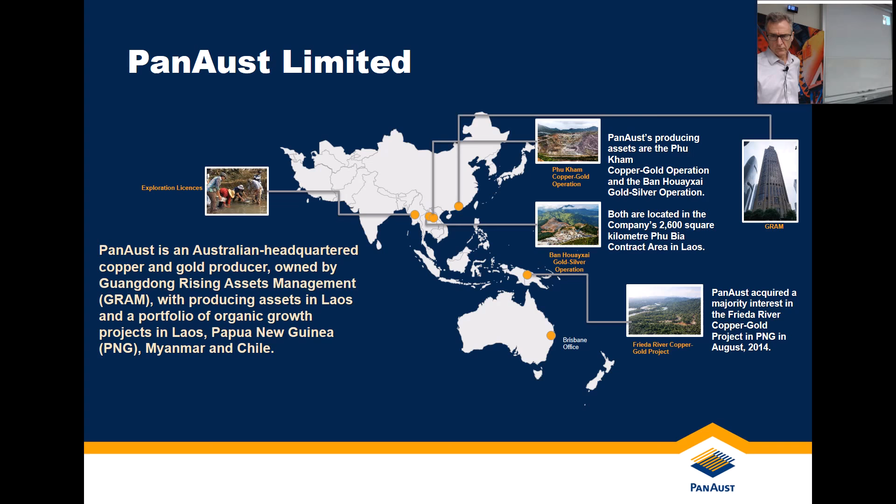So we produce copper concentrate, and the copper concentrate has gold and silver in it, and that's what our sellable product is. So Phu Kham was commissioned in 2008, and the control loop set points were mainly determined by the operators as and how they saw fit.

In 2010, the technical director at the time decided that we need to change things, and he wanted to automate the plant so that we could improve our throughputs and recoveries. So he put together a team of technical experts, and in 2012, with all seriousness, we started trying to transform this plant.

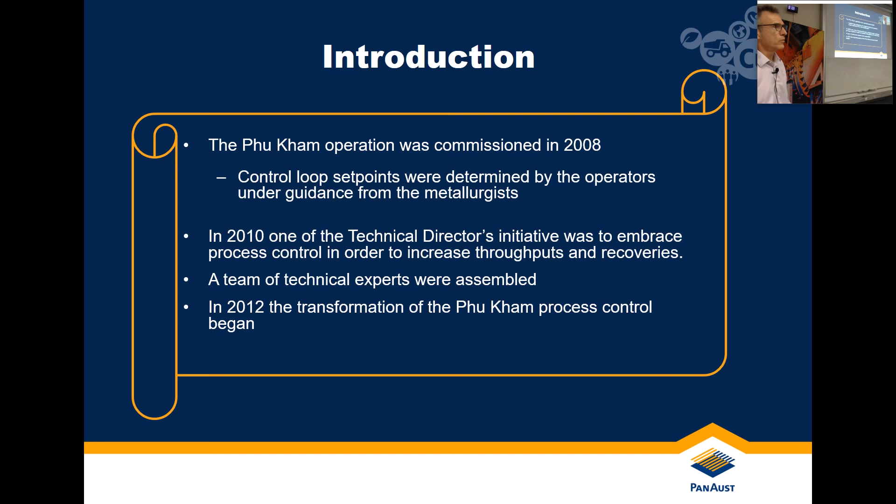Our strategy first looked at what the problem was, and we saw that the operators were sitting down at the bottom and they were just setting all the regulatory loop set points. We wanted to move them up so that they're actually not adjusting set points. They're just monitoring the operation, and if something goes wrong, they must intervene upon exception.

So to achieve that, we had to improve the stability of the regulatory controls, develop some advanced control systems, and then we needed a holistic control which would tie the whole plant into one operating unit. And the operating unit's objectives would be determined by the company's objectives. So that was the idea.

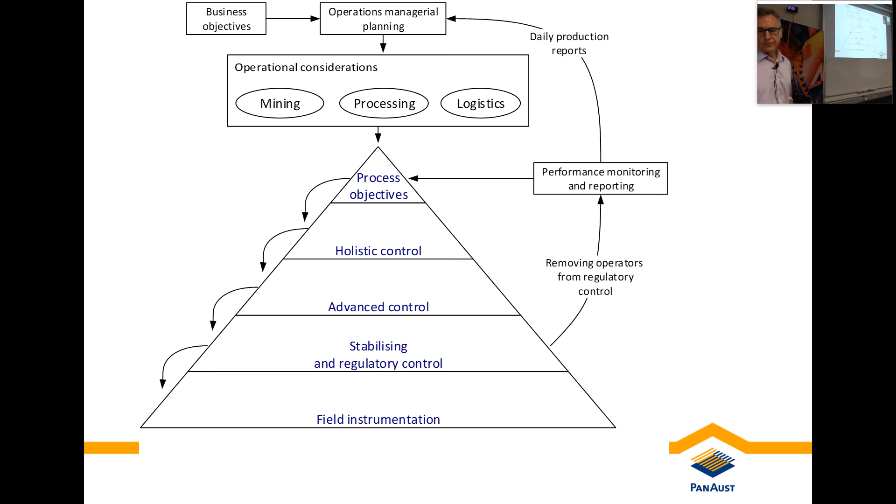The strategy: lift the operator's role from setting individual loops to monitoring and intervening on exception. The expertise lies within the metallurgists. They've done 4 years of studying and so many years out in the field, as opposed to an operator who's been just exposed to a very small spectrum.

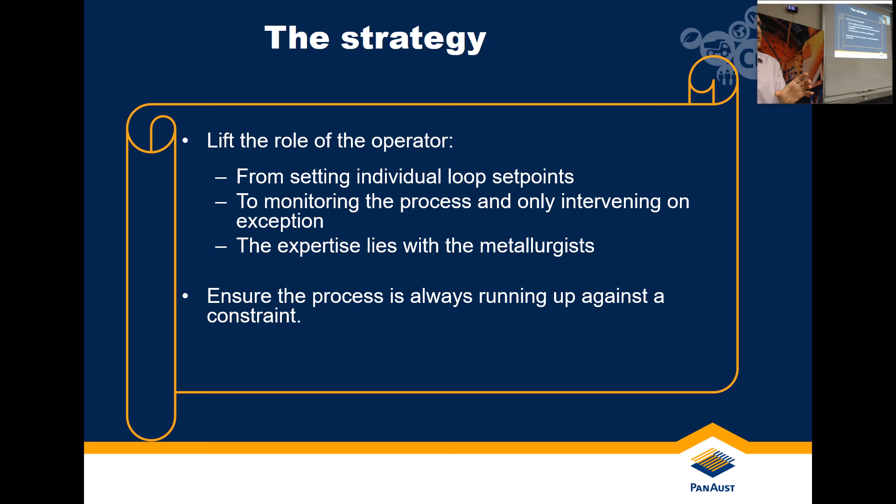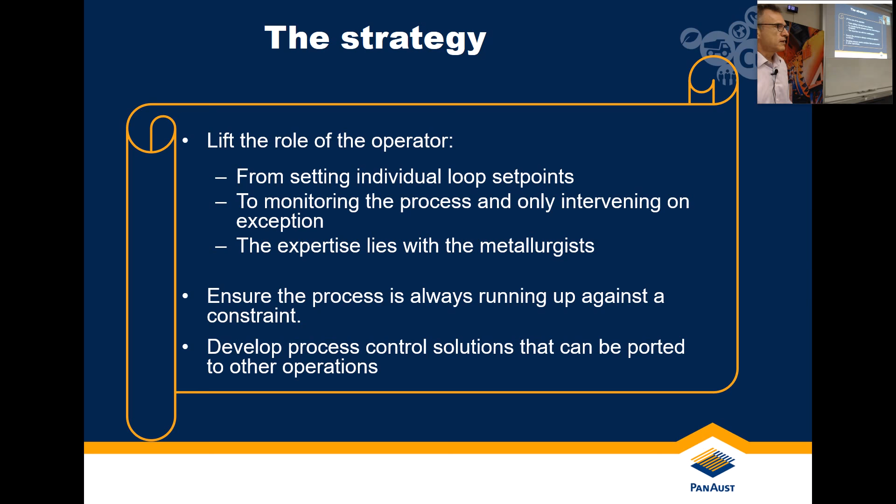So we also want to ensure that the plant is always running up against a constraint, so therefore we can get the maximum throughput and recovery. And we wanted to develop solutions that could easily be ported to another plant, so we don't have to redevelop the wheel every time we have the problem.

So the tactics were: start at the bottom and stabilize the plant, get the instrumentation working, and apply good first principle loop tuning, which is boring and overlooked.

The next step is to improve the operator's situational awareness. This is very important because the operator needs to know if there's a problem so he can intervene at the right time. So that means the graphics and the alarming has to be designed for the operator.

And then we needed to identify what are the best solutions going to be, because there's so many solutions on the market. We've got these fuzzy expert systems and all other different things. We decided to just go with model-based control, and there's a little bit of model predictive, but it's mainly model-based control. So it's understanding how the plant behaves and then making a control model that will control the plant.

And we developed all this in the DCS, and we didn't want to have another black box tied on, which has communication problems between them and all that sort of stuff.

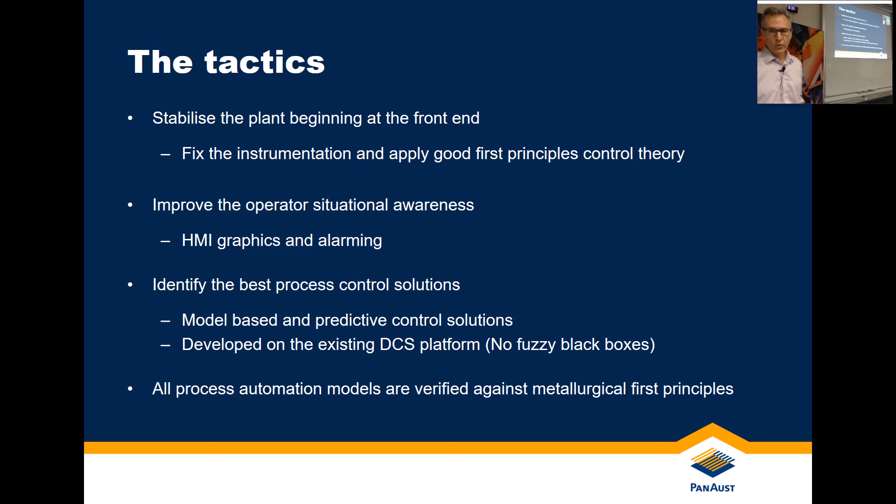The other thing, once we identified a process model and seen, okay, this is how the process behaves, then we wouldn't just go write some control. We'd then look up some papers, just understand, are we sure? Do we really understand why the process is behaving like this? Has other people seen it? So it actually took a bit of time. It wasn't a couple of weeks that we could just go through this and get it going.

Okay, before I go any further, I just want to give a rundown on what the plant looks like, so when I talk about different areas, you guys will know what I'm talking about.

The concentrates from the roughers go through a regrind circuit before all the fast floating stuff is scalped by the Jameson Cell. Then we have the 3 cleaner banks. We did some modification on the cleaner banks because we found there was a bottleneck, so the modifications we've done around them, including splitting off the first cells, address the bottleneck. And finally, the dewatering.

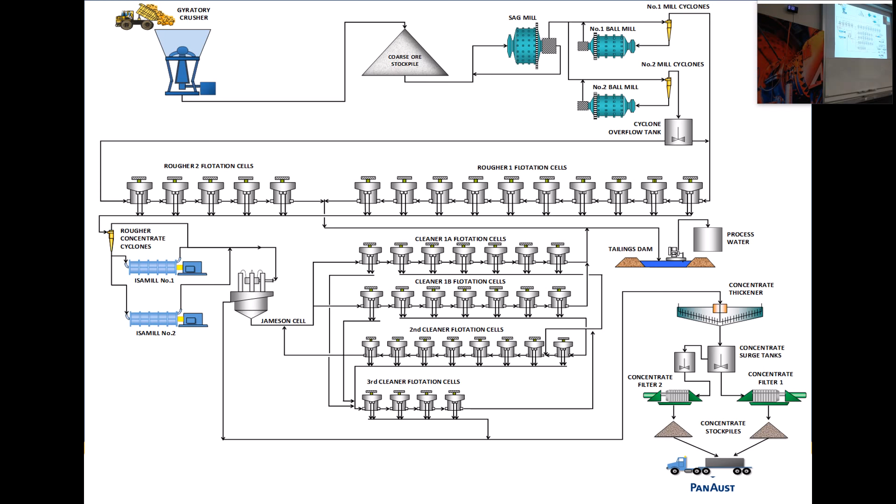So we started with the instrumentation. People often see this as boring and run of the mill, but if your instrumentation doesn't work, nothing's going to work.

What we found was a large number of the valves were incorrectly sized and controlling at around 10%. Most valves have a bit of hysteresis, 1 or 2%, but that's a 20% jump in flow, and we couldn't control the water, which is the most important thing in the grinding circuit. The other thing we found was the valves were designed to meet the pressure, but not the pressure drop across the valve, so there would be massive cavitation and eventually the valves would disintegrate. We had to select valves that could handle the cavitation and were correctly sized, so they're operating around the 70% mark where a valve should be.

Although this is very straightforward and obvious, when the guys designed the plant, it wasn't designed like that. So we had all the wrong stuff.

The next thing we found was a lot of our flow meters didn't work properly. They were water flow meters and not slurry flow meters, so all the bumping against the electrodes would create noise and we had to filter out the signal. We couldn't use the flows for actual process control, only for mass balancing, which was a bit unfortunate. It was also very expensive to replace these dirty great flow meters, so that was something we just learned to live with.

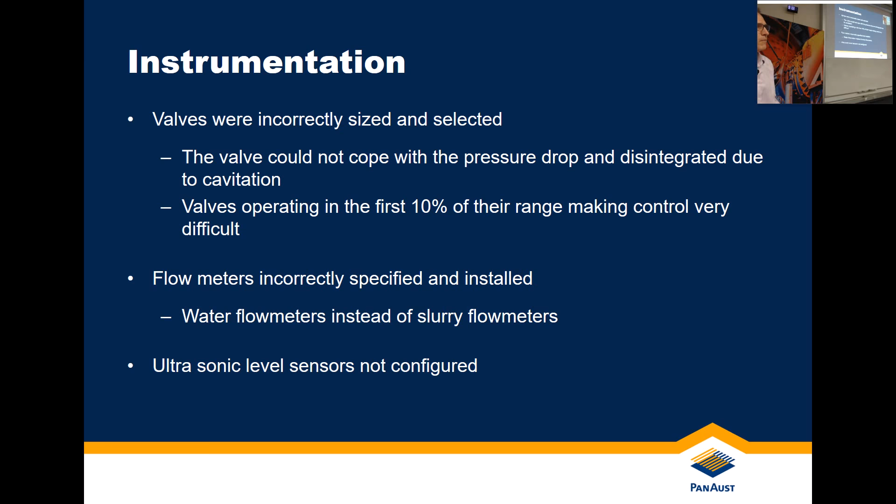And finally, ultrasonic level sensors - they're really clever nowadays. You put them in a tank and you can teach them where all the interferences are, but I found that nobody did that. They just banged them on, set the range, and that's it. So as the level comes down to 40%, suddenly it starts jumping all over the place. But there's a way around it, and we didn't have to deal with all those problems. There were so many little issues which were very basic - if you just read the manual on the instrument, you wouldn't have incurred those problems.

Right, the next thing I found was the loop tuning. A lot of the loop tuning was done using the old Ziegler-Nichols method, trying to get the loop almost unstable and cracking it back one. Now, you must realize Ziegler-Nichols was derived in the 1930s or 40s, so it's probably not the best way of tuning a loop 80 years later.

The best way to tune a loop, the way we tune loops at PanAust, is pole placement. You identify the model of how the process behaves, and then you tune the loop accordingly. But what you do is ask: what do I want this loop to do? Is it supposed to be a fast loop? Is it a slow loop? Is it surge arresting? What is its purpose? Once you understand the purpose by speaking to operations and the metallurgists, you actually calculate what the numbers should be on the PID block.

So there's none of this having somebody twiddling with little numbers and then seeing what the response is. No - you calculate what everything should be, you put it in, and if you've done your calculations right, it's normally right. So we had to go through all the control loops. Again, nothing sexy or flash.

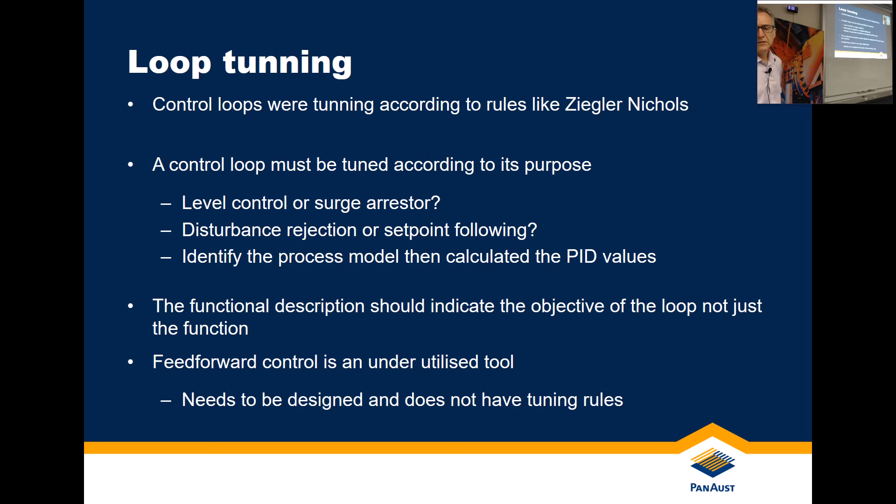The other thing I found is no feed forward was used. Feed forward control, you get taught at uni, and I think that's the last time people actually do it. The problem with feed forward control is there's no Ziegler-Nichols tuning method. You have to identify the process, but you have to identify a number of processes, where the disturbance is coming from, where the process that's being impacted, and then you use the combination of the two to calculate the feed forward transfer function. We're all taught that at uni, so we should be able to do that, but it's not done. And if you get the calculations right, feed forward is so awesome. You have a surge in the grinding circuit, and the roughers aren't going to be impacted at all. So it's something important that has to be done.

Okay, enough whinging about the bottom layer. Now I'll talk about some small improvements we did. At the crusher, we had the conveyor belt, about 1.2 kilometers long, overloading quite often. When it overloads, you put excessive stress on the belts and everything else. What normally happens is a rock will fall off and hit the pull wire, and you stop, then have to start up on a loaded belt. So we had a lot of niggly little issues in the crusher, so we looked at how we could reduce the overloading, reduce the spillage, and improve it.

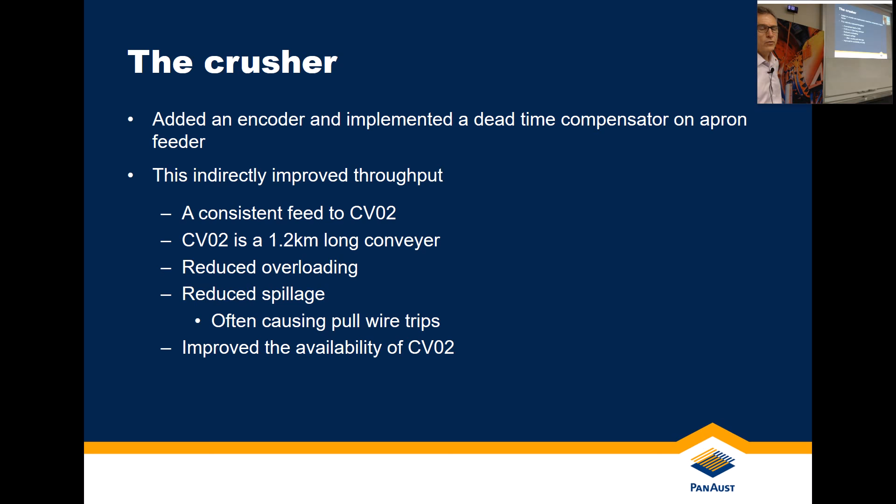So the original control was just a very simple PID, controlling to the set point. The problem is you have a feeder pouring rocks onto the short conveyor, which drops onto the main conveyor, and the weightometer is over there. Because of the large dead time, you actually can't use a simple PID controller. You have to put in some dead time compensation. That was the first obvious thing we put in.

Now, dead time compensation was identified by Dr. Smith around 1957, and it still isn't used very often, which is very sad because it's been around for a long time.

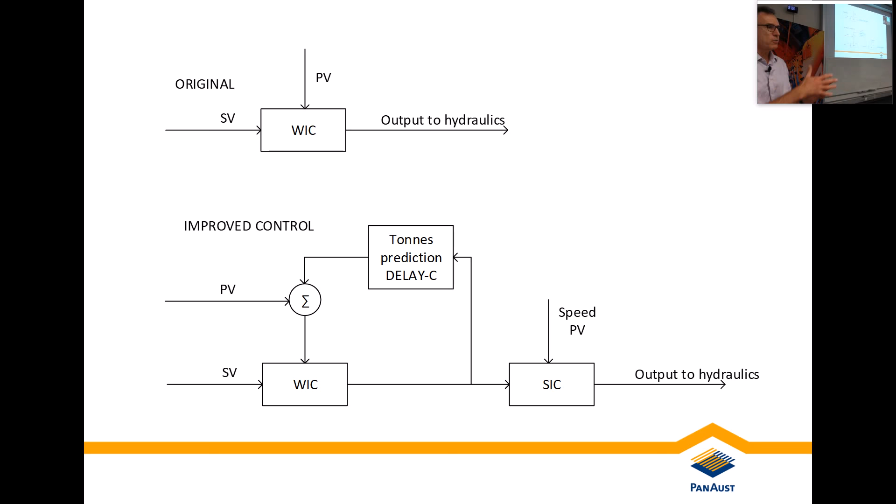The next thing we found was whatever signal we gave to that hydraulic feeder, it wasn't necessarily the speed the feeder was going to run at, because the 4-20 signal just adjusted a little swash plate, and we were just hoping for the best. We did some analysis and found the actual command signal to this feeder was quite different to what the feeder was running at, and we had to ramp it up before the feeder would speed up. So to solve that problem, we fitted an encoder onto the feeder, fed that back, and put in a little speed control.

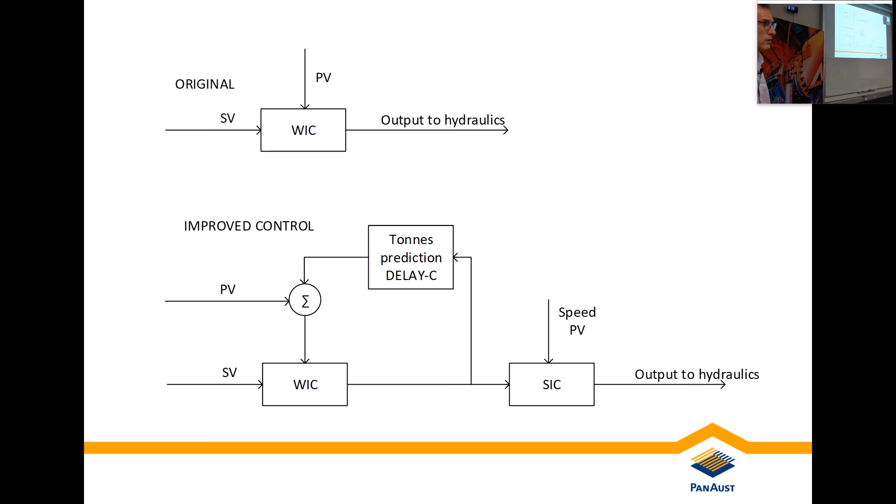That's what we want to avoid. So we increased the throughput from this crusher, and we're running in a much tighter band, not exceeding its limits as often. What we found was all the pull wire trips and those horrible niggly issues tended to just go away. We did get more throughput through the crusher, but that wasn't the main objective since the crusher wasn't a bottleneck - it was a nice bonus.

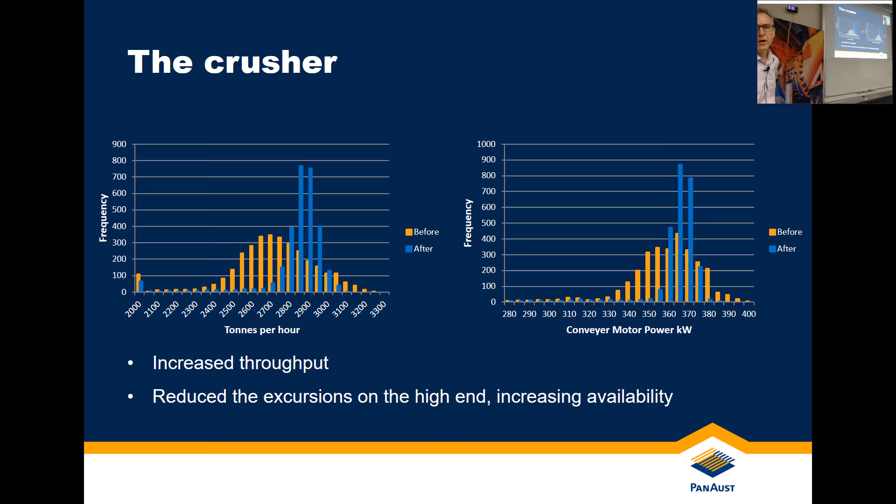So then we had a look at our operator situational awareness. The operator is a part of the control system, and without situational awareness, it will take longer for the operator to work out what's going on and what changes they must make, and sometimes they'll make the wrong change because they're just not sure exactly what's happening in the plant, for many reasons.

So the biggest problem we found was the HMI colors. They need to be meaningful, and what our system had was everything. It looked like a Christmas tree - there's no other nice way of describing our HMI. There were little flashing lights, and it was just chaos.

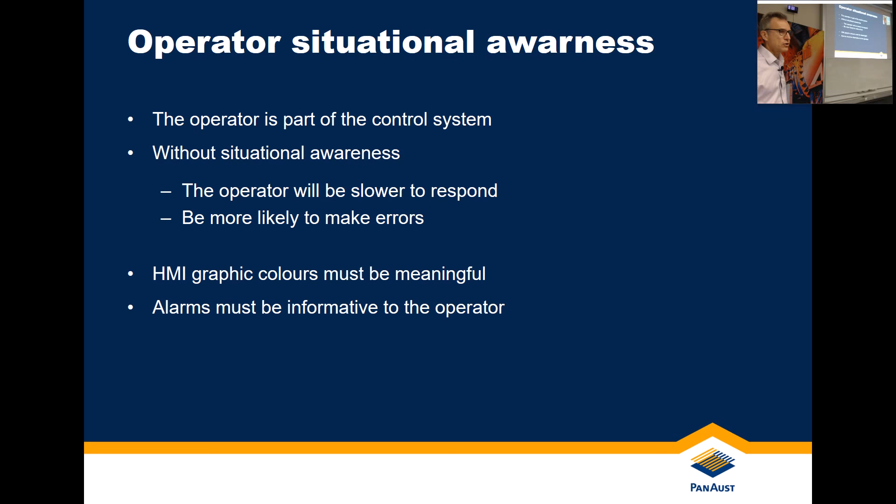The alarms need to be very informative to the operator. So when an alarm comes up, it's not just 'hey, there's a problem' - he should actually know what to do.

This is what our HMI graphics looked like before we started, and you can see it's pretty chaotic - there's green and flashing lights. Actually on that day the plant was running well, even though no one could really see if it was working well or not. The four alarms saying there's an issue in the float, regrind and auxiliary area were just false alarms.

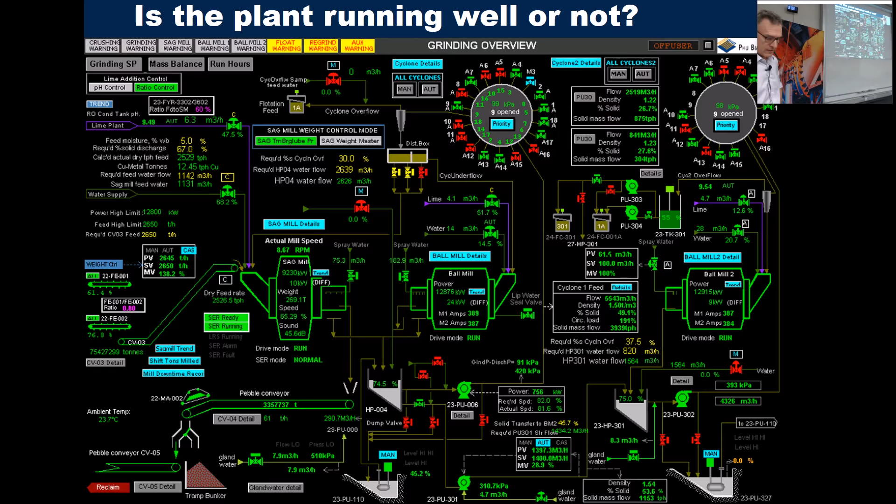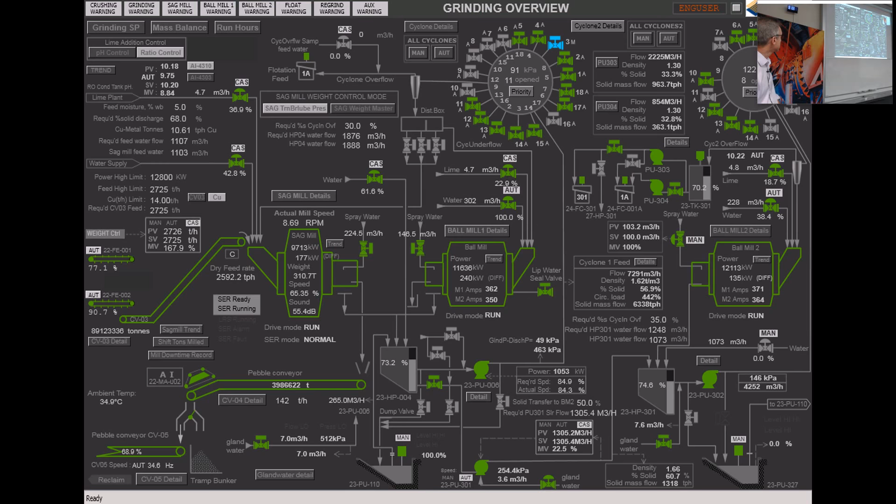So we changed our graphics to a very dull green for running and grey for not running. If there's a problem, it must be red, yellow, or orange for interlocked. Here we can see everything's going well, except one of the valves is out of service. That's quite easy, and it's not glaring on the operator, so the operator should suffer less fatigue looking at a screen like that.

Our lessons learnt from the HMI alarming: change is always difficult because we had one system and we were moving to another. People were familiar with one set of colors. There was a lot of pushback initially, and then after a while people were saying, hey, this is actually better - but that didn't happen straight away.

It wasn't easy. Converting online graphics is tricky because you're doing it page by page and you don't want to interfere with the operation.

So when you're designing a plant, make sure your graphics adhere to the ASM guidelines and that your alarming also adheres to the alarming standards. These standards are pretty recent - they've only been out for about 4 or 5 years. There used to be the ISA standard, but now there's the IEC and Australian standard for alarming.

The take-home message for alarming is: an alarm is an audio or visual means of indicating to the operator an equipment malfunction, process deviation, or abnormal condition that requires a response. So if an alarm does not require a response from the operator, it is not an alarm - it shouldn't even be there. Maybe if the mechanics want something, they can have a notification system that sends the mechanic a notification, but it's not an alarm.

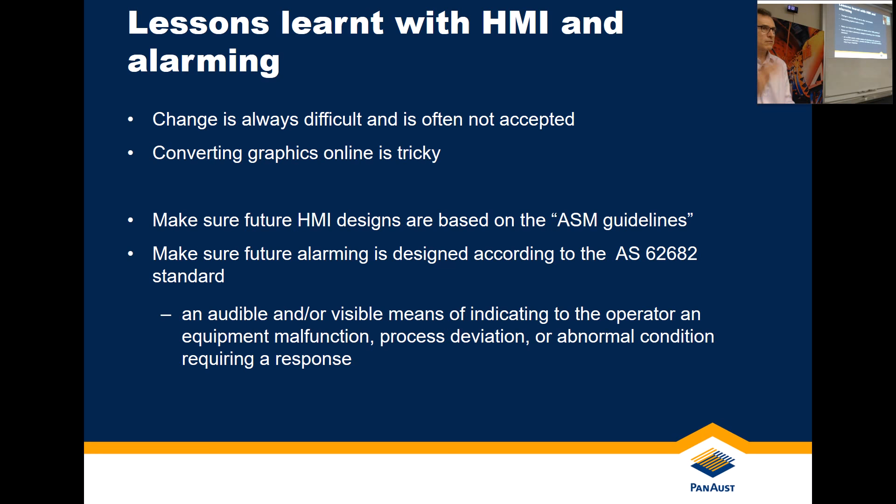The biggest problem, once you've started a plant, is to remove all these alarms. So it's so important that in the design phase all your alarms are specified - the alarm must be this, and the operator must do that when he sees it. Not just, we'll have four alarms for every analog signal.

Right, now we get to the fun stuff. That was really my whinge of just getting things done properly. We started at the SAG mill.

That was our first bit of advanced control that we started with, and it's a true multivariable system. We don't want to exceed the SAG mill power, the mill rotor current - because it's on a slip recovery unit - the mill weight, the SAG mill noise, the recycled pebble load, and at this plant we've got a constraint of 18 tons of copper going into the plant. We can't exceed that because of the downstream constraints. And we've only got SAG mill feed rate, SAG mill speed, and SAG mill density to control.

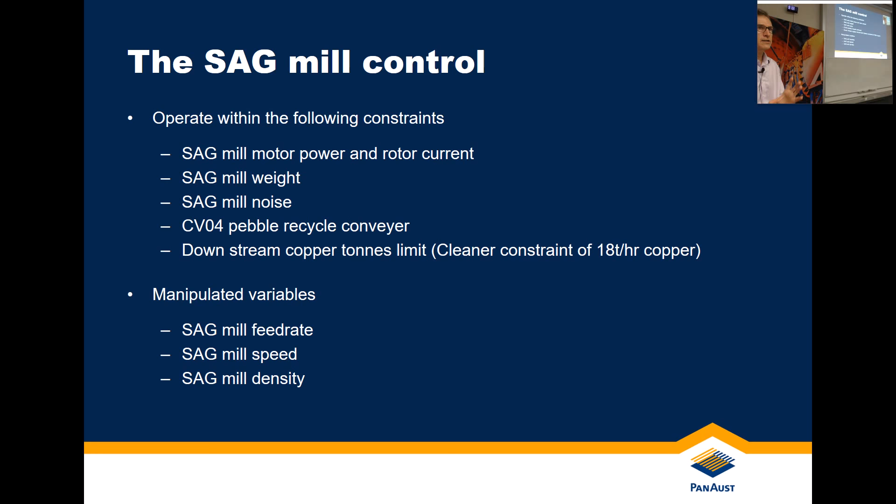So we came up with a multivariable model-based control system. I was asked, how does it actually work? First I tried to put something together on a P&ID, because a lot of people were asking me 'when this and if this', like an expert system - but it's not an expert system, it's a model, so I can't say at any one time what's going to happen. I've got a rough idea of it. So I tried to do this and I put together a P&ID, but I got about halfway.

It doesn't cover all the interactions. So all I can say is, as Dirk gently would say, everything's connected - and that's what I'm trying to show. It's a model, everything works together.

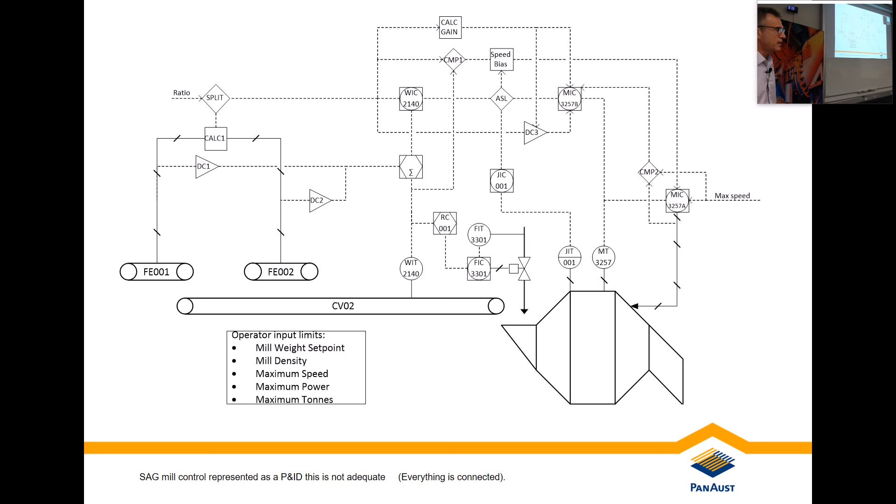Then I came up with another idea of trying to explain how it works. We've got a gain profile, and the controller gain looks at the current throughput of the mill, because the current throughput gives you a good idea of the grindability.

We change the gain depending on that grindability factor, or the amount that can go through. If you've got really soft ore, to make the mill weight go up by 10 tons, you're going to have to put a lot more ore in. When you've got really hard ore and it's staying in the mill, if you want to make the mill weight go up by 10 tons, you just put a little bit more ore in. That stuff's not coming out quickly.

So we have this gain profile that the mill adheres to. Now it's actually got a fourth dimension because it also works on speed, because speed is also an indicator of what's happening in the mill. So in some areas on this profile it won't get there, but the speed down in the green area would lift that profile up. I've sort of made a bowl in a weird way, that if you drop a marble, which is a mill weight, it will want to run into the middle of the bowl. That's the best way I've been able to describe how model-based control works.

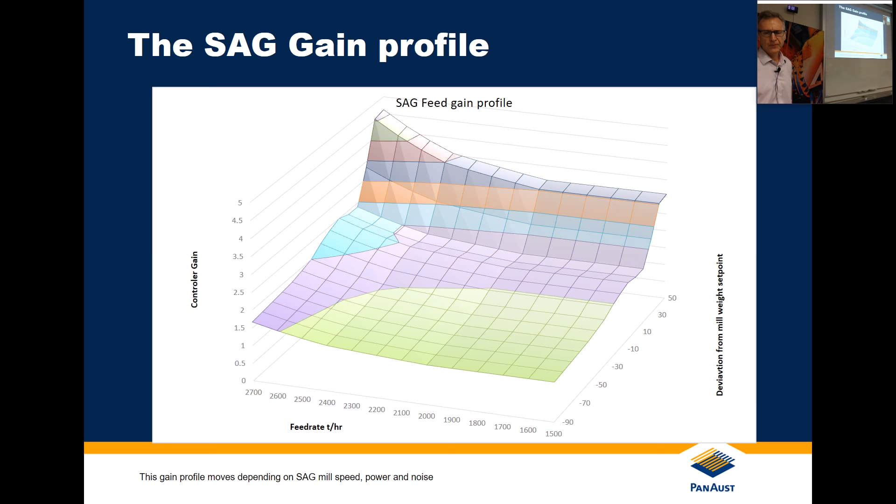Our product size distribution also improved. What we were finding in manual operation, because we had a very variable ore body, the SAG mill and grinding circuit were a little bit all over the place. We were sending a lot of pebbles into the roughers, and they would actually jam in the dart valves, which caused a problem we'll talk about later. But once we implemented this, we stopped sending all crazy particle sizes through to the roughers. So we got a benefit in the roughers as well, but I don't really know what that was, purely from the SAG mill. We've been working a lot on the SAG mill control.

So from about 2012 we've done lots of little refinements, and we've got to the point where the utilization is around 97%. A lot of those refinements were understanding why the operator takes the control out of auto and puts it in manual. There were some disturbances we just hadn't thought of. So we had to understand what the disturbance is and create another little piece to add onto the model so it can cope with it.

Things like feeder trips and all those little things, we just combined it in. So the SAG mill just moves as soon as the feeder trips - boom - the speed slows down and it just takes care of itself. And that got the utilization up.

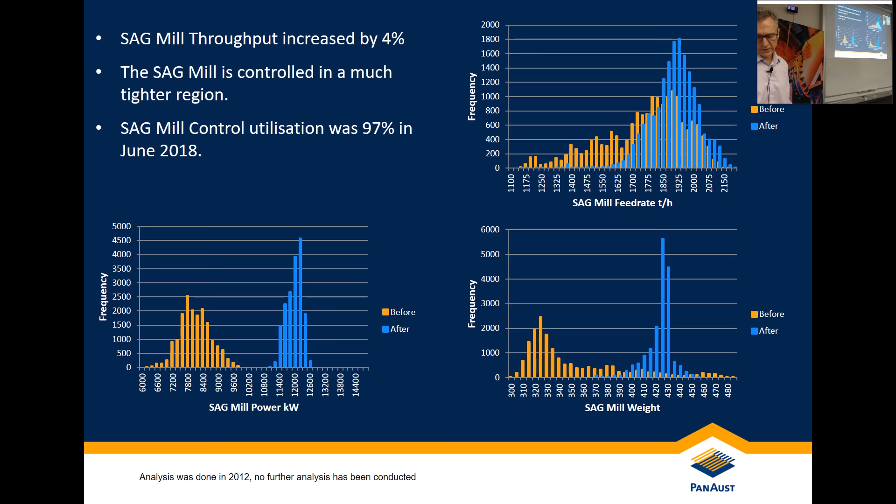The next one was the roughers. The operators used to walk up and down adjusting them. There's 15 cells, air and level on each cell, and all the OSA readings you have to take into consideration, and there's five frother addition points and five collector addition points. We had a whole lot of float operators continually walking up and down adjusting stuff, so my objective was to automate the whole rougher circuit.

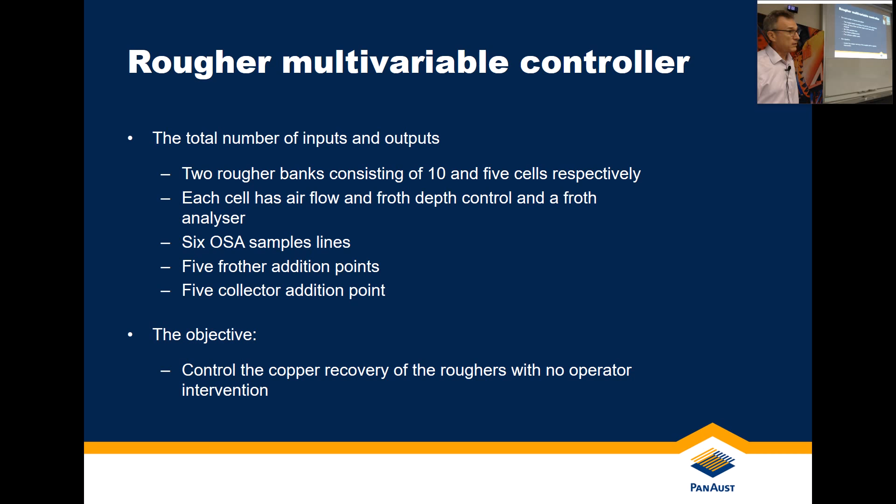We wanted to improve recovery and have no operator intervention. That actually was a huge project - it took nearly 3 years. What we started off with again, we had to repair the dart valves, we just suffered from pebbles, and then we eventually got everything working. Then we had to say, right, how do we want this thing to control? Because the level, the air, and the froth velocity all work together and they work on recovery, so it became quite complex.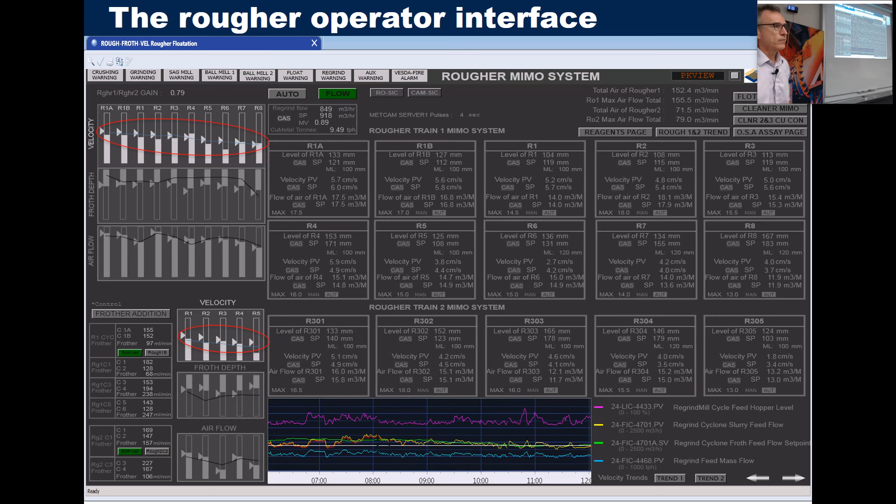In the middle, it looks at the amount of copper coming in and determines the mass pull required. Then from the mass pull, it determines the frother addition and the levels on the airflow.

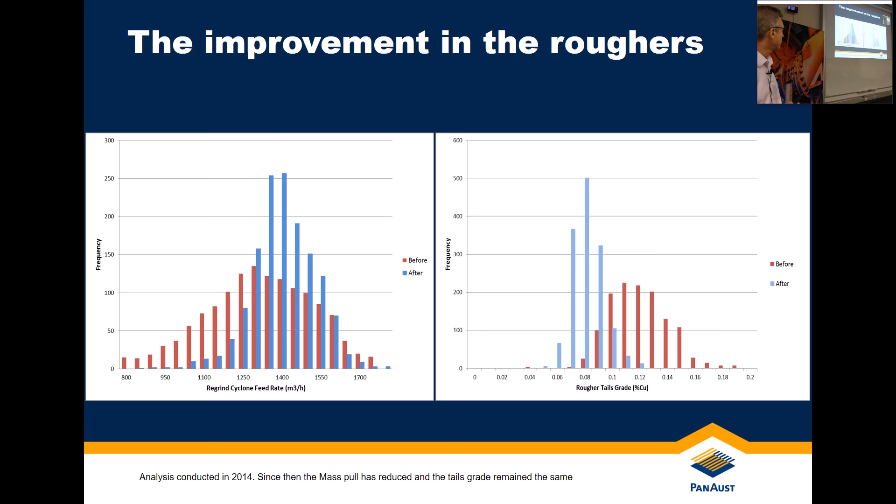This gave a huge improvement. You can see our tail grades in our rougher dropped down to about 0.08 on average from around 0.12, and it's in a much tighter band. So obviously with our tails dropping, the recovery went up a lot, and we were sending more consistent feed to the regrind and cleaners, which improved them.

Finally, we then started on the cleaners. First we debottlenecked the cleaners, which was a lot of physical work, and then we went on to the Jameson Cell.

What I find quite disappointing was Atkinson in 1993 wrote a brilliant paper about how to run a Jameson Cell, and in 2013 we weren't running our Jameson Cell as he recommended, which is quite sad. So we did all the test work that he pointed out, and we found, yes, everything he says we see in our Jameson Cell.

So then we developed a control model based on that, but we found we were actually missing some instrumentation. Atkinson said you must control the wash-water ratio, but we couldn't, because we didn't know how much pulp we were recovering. So we had to put a flow meter and a density gauge on our concentrate line. Only then could we get the wash-water ratio, and only then could we get this Jameson Cell working properly.

So it was a bit disappointing that the instrumentation required to get the Jameson Cell working properly is known, but it wasn't implemented.

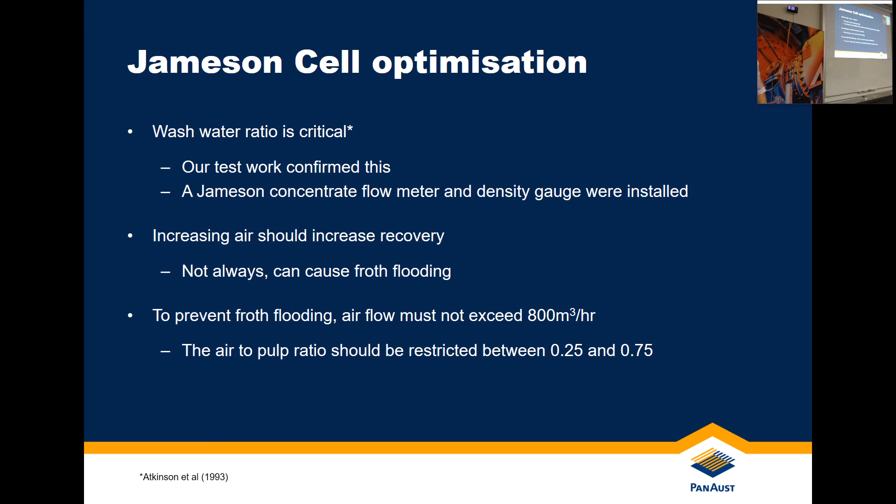Then we moved on to the mechanical cleaners, and we had to understand how they were being run—using pH to try reject pyrite, and then increasing collector to try increase the recovery of copper. That doesn't actually work, because the pH rejects pyrite and reduces the amount of copper you're going to recover, and then the collector just does the reverse. So you end up just using more reagents for this to get the same result.

So we decided, well, if we have high pyrite, we will try and reject the pyrite just on the kinetics inside the froth. So we're going to treat these cleaners very delicately—just getting the right amount of air, not pulling as hard as you can in the first cell, but pulling out a little bit and getting each cell to work all the way through the bank. We found that we would reject more pyrite and get more copper because of the difference in the kinetics of copper floating versus pyrite floating.

All the things we found is more air results in more water recovery and more entrained gangue, so it's not really the best thing. And if you read papers by Cilliers, you'll see he's talking about air—maximum air isn't the best thing, it's the right amount of air that's the best thing.

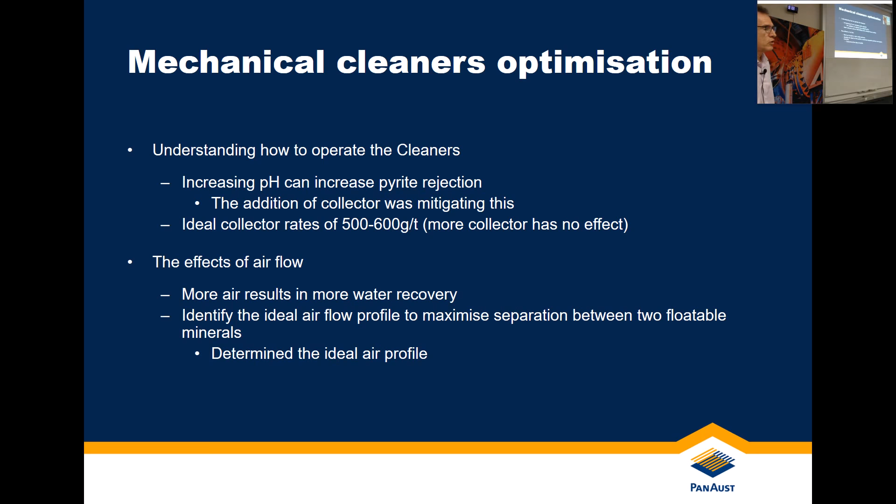The other thing we found is we wanted to control the grades, and I tried using the OSA, and it was really difficult because every now and again the OSA gives us a bad reading—because the pump just sort of bugs for a short while, or there could be anything. You know, measurement theory always says there will be some dodgy little sample now and again.

So I tried putting a first order filter, and what that resulted in was it just delayed the whole signal so much that I couldn't use it for control, because by the time I wanted to act on that signal, the process would have changed.

So I had to find a different form of filtering, and I came up with a stochastic filter, which looks at the probability of error. I assume the true reading is if we get exactly the same as the last reading, and the greater the difference, the higher the probability of error. So if you suddenly have a jump, it's probably a bad reading, but if you have another reading up there, then it's probably a good reading, and I can move the process there quickly.

So using that, I can now start using the OSA signals for control purposes in the cleaners.

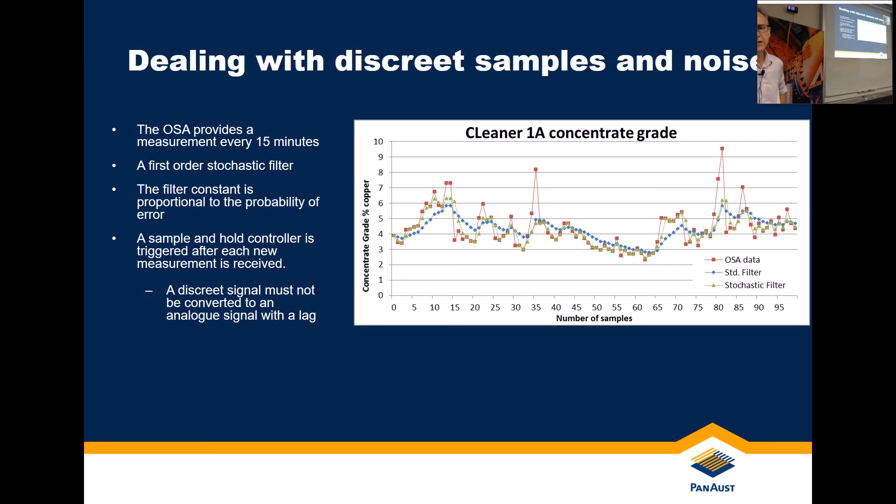Okay, and once we had all this information, I could go about doing the automation. The aim of the Jameson Cell was to get a really good quality con of 29%, and then get the mechanical cleaners to tease out the rest of the copper, and they would only achieve about 20 or 19%.

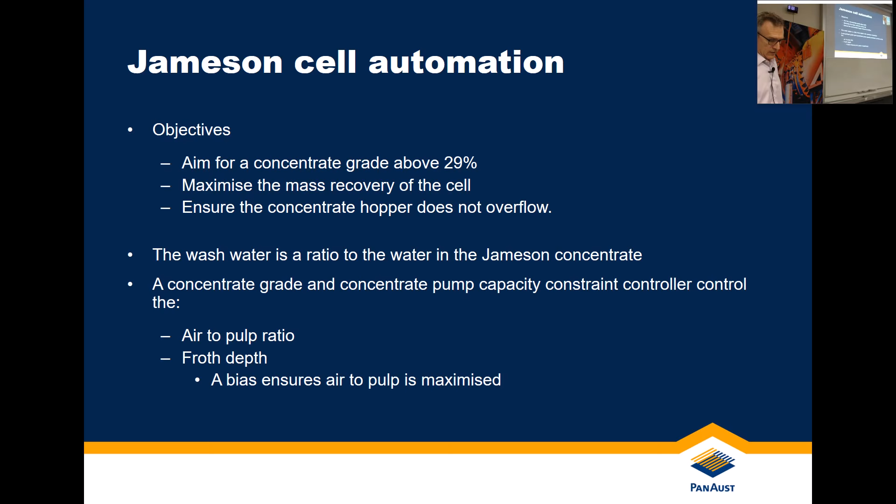And then the combination would make our 23% con that we were after. Then with the cleaners, we found that we would build up recirculating loads, and that would overload the cleaners. So we're thinking, now how do we get around that?

This isn't my bit of work, this is Luke's work, and he came up with a way of determining what the concentrate set point should be on cleaner 1. That gives cleaner 2 and cleaner 3 the ability to achieve their objectives, because if you overload them with too much con, they don't perform well, and if you give them too little with too high a grade, you get a good grade but you don't get the recovery.

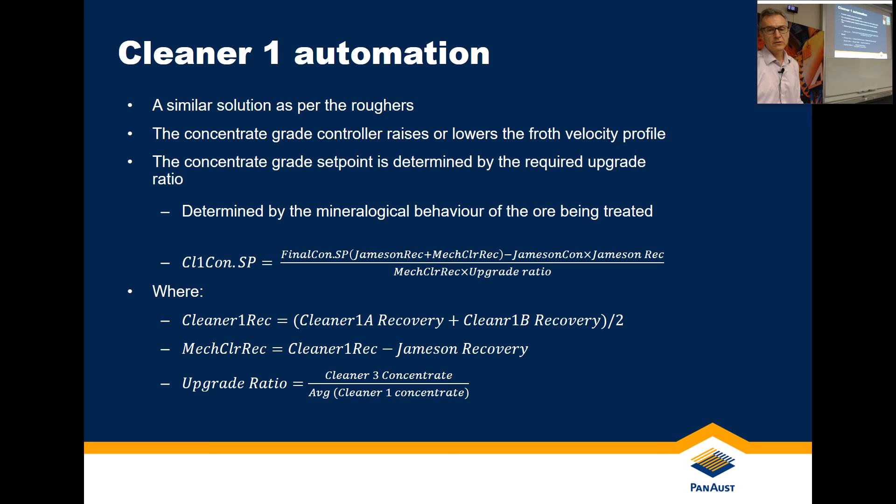So Luke came up with this formula, and it determined what the concentrate grade should be from the cleaner 1 concentrate, determined by our objective and looking at where the Jameson cell is running. That tied together the 3 cleaner banks. For cleaner 2 and 3, we did what we did in the Jameson cell - we implemented some constraint controls and moved the profiles, and that was all determined by metallurgical test work.

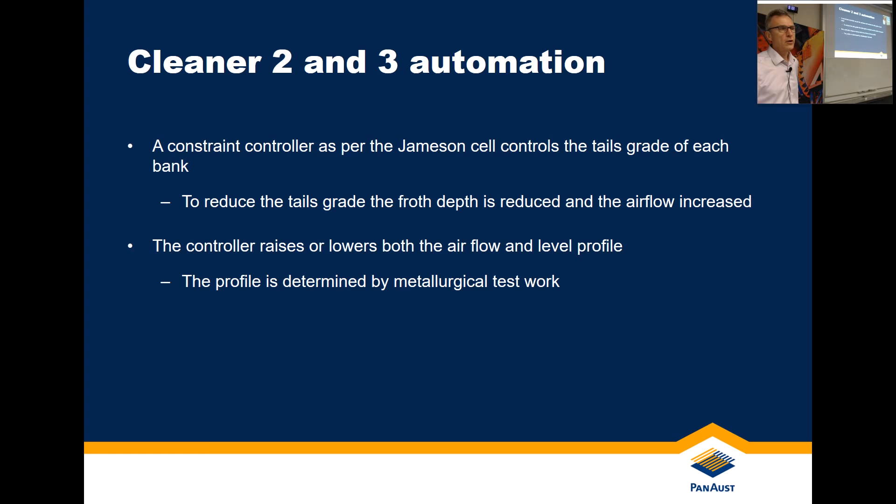So now, the proof of the pudding - you can see that the copper grade on the Jameson cell has come down a little bit, but the recovery has moved up a lot, and we're in a tighter band, so we were actually getting more copper off the Jameson cell.

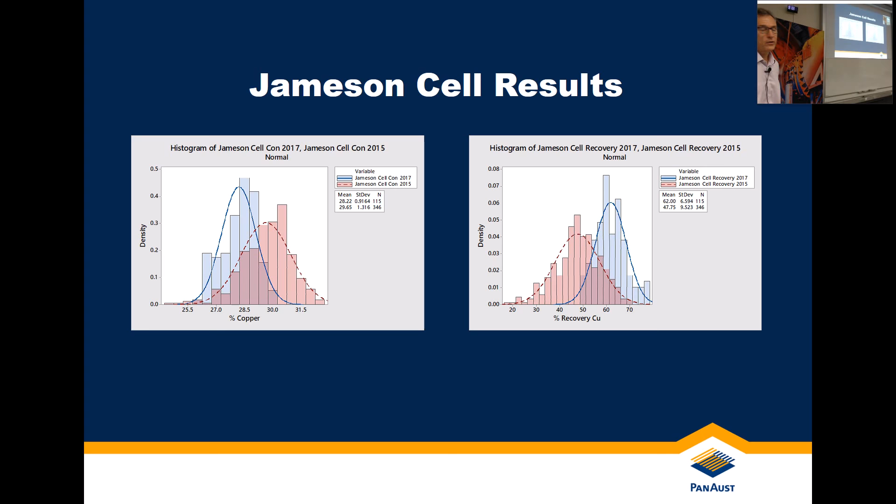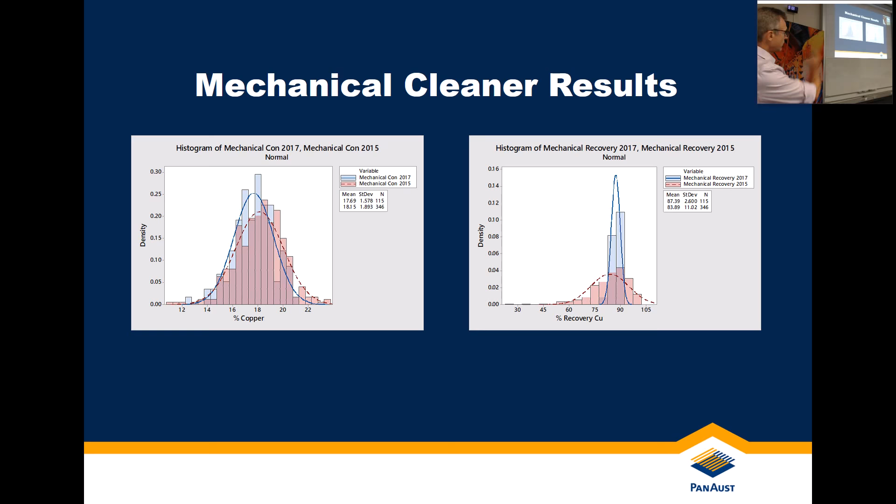And then with the mechanical cleaners, the copper grade again moved down a little bit, but the recovery moved up and was in a very tight band. If we combine the two together, we find the actual concentrate grade from the combination moved up, because you didn't have one performing badly and one performing well - those two were sort of seesawing. Now you had them both performing well, and we got an overall improvement in our copper grade, and obviously the copper recovery came up as well.

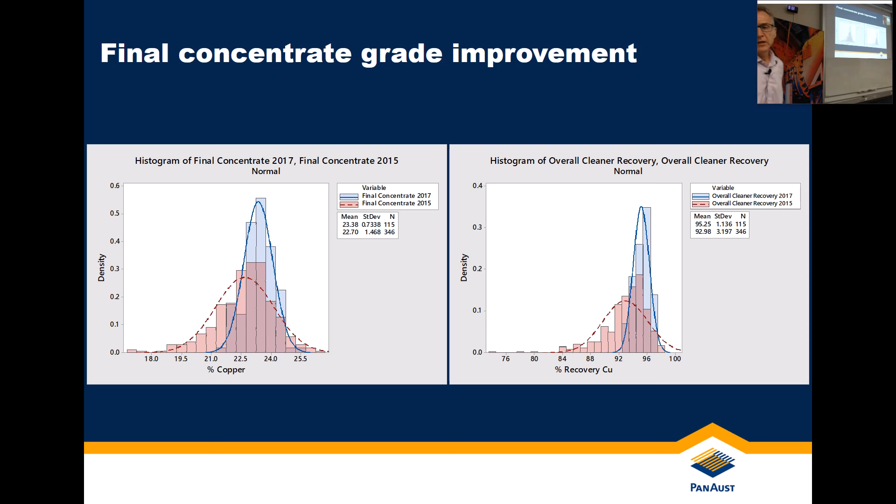So that was quite... we were quite happy with that.

So the journey, if we break it down, we started with the SAG mill in 2012. We just got the feed rate going to get a bit of stability.

In 2015 we put in the noise analyzer, and that serves 2 purposes. One, to protect the liners so we don't get too noisy. The other, we don't want the mill to be too quiet, because on soft ore, the mill would go really quiet. We'd slow it down to try and maintain the mill weight, but we were turning it into a ball mill with no impact, and we'd build up a large circulating load of pebbles. So we try to keep a little bit of noise in the mill to keep busting those pebbles, and stop building up this recirculating load, because the downside is as soon as hard ore comes through, you've already got this big load of pebbles, and boom, your SAG mill just lands in trouble. So that was a bit of a win.

Okay, the roughers, yeah, that took 3 years.

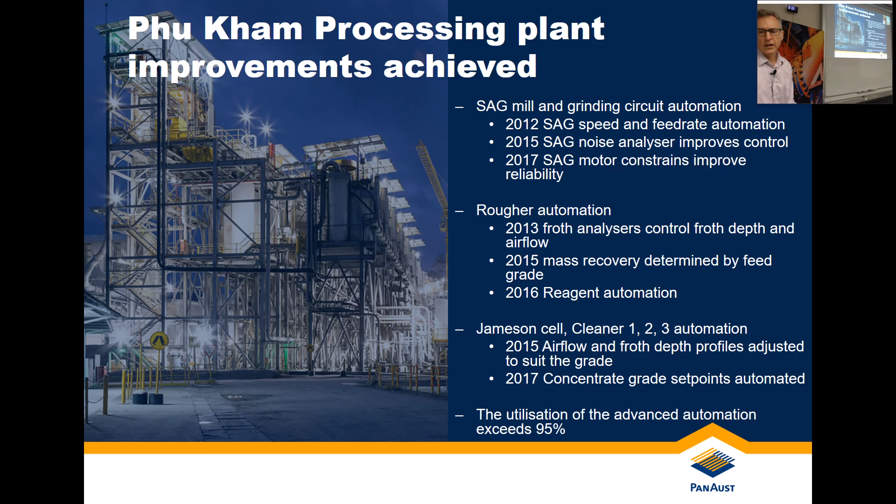First, just getting the froth analyzers to work to get the right mass that we needed, and then the reagent automation. And then the cleaners took a bit quicker because now we had learned quite a bit from doing the roughers. And finally, we get a utilization of about 95%.

All our automation, we determine what the process does. And I know I've said it many times: understand the process, model the process, and then determine what's the best way to control it. And make sure that you document everything so you can just port what you've learnt.

So we took what we learnt on the SAG mill and we took it to BHX. We put the same solution in at BHX. Took about a week, bang, that was running.

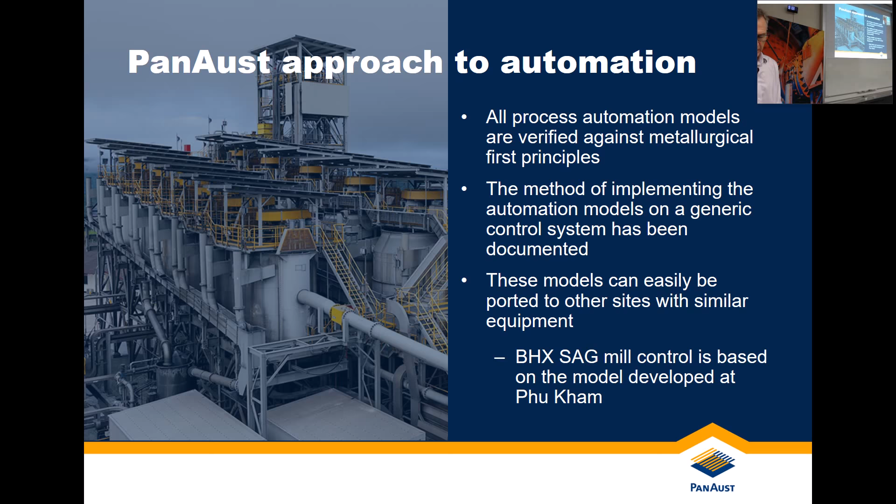So the advantages of automation: we reduce variation, and that allows us to bring the process closer to its constraints, so we get better throughput. The understated benefit is the accuracy of the metallurgical test work improves. This was very noticeable when we were doing our cleaner test work, because we weren't getting surges in the cleaners, and the test work just came out so beautifully. Probably also we got good met techs as well at the site.

And then this allows you to improve the model even further. And because your plant isn't going all over the place, you're not exceeding its constraints. So the plant availability and reliability improves as well.

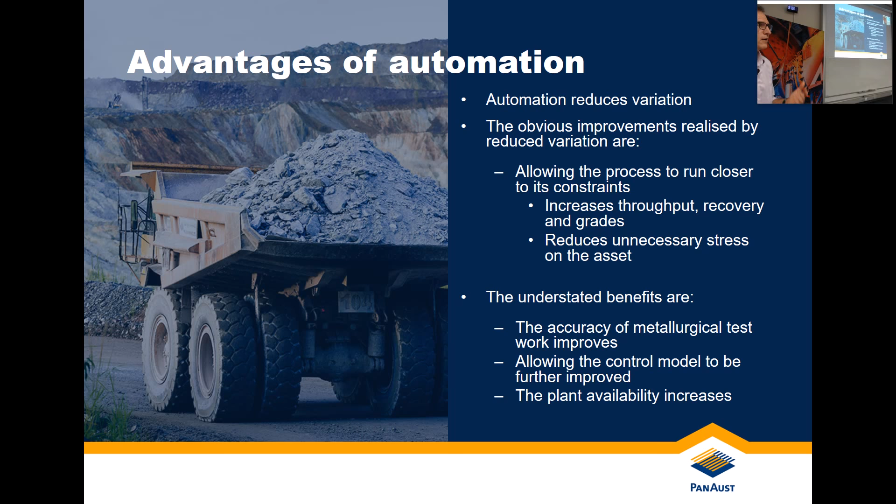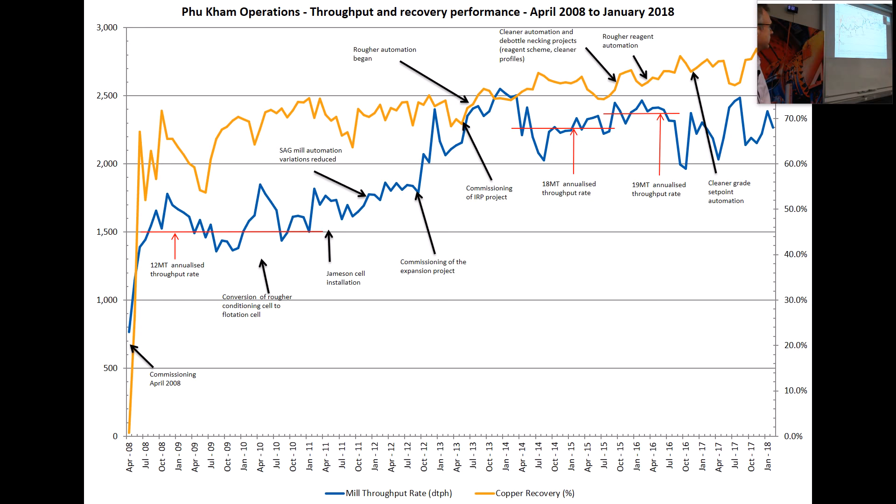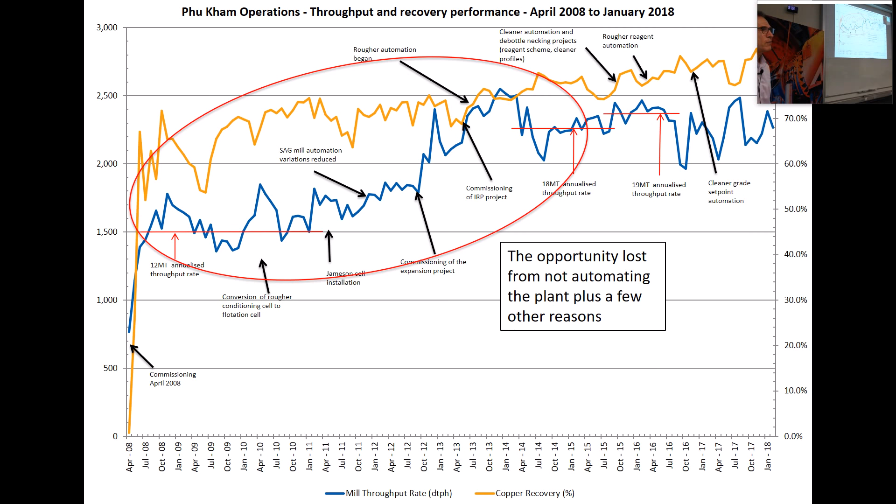But it's not a good story. It's actually a bad story, because we lost a lot of recovery for the first 6 years of that plant. That's copper gone. We know it's in the tails dam, but it's essentially gone. We never get it back. So why didn't we start the plant at these higher recoveries and higher throughputs initially? It would have saved so much more money than this project actually saved.

So going back, Duncan and I put this together. This is our hierarchy of controls. If you start a new plant, you start off with: what are my process objectives, and you work down. Okay, I want it to work like this, therefore I'll need that in place, therefore I need these controls in place, and therefore I'll need that regulatory control. And these are the instrumentation I need. Now you go and build a plant, and it will achieve what you want it to achieve.

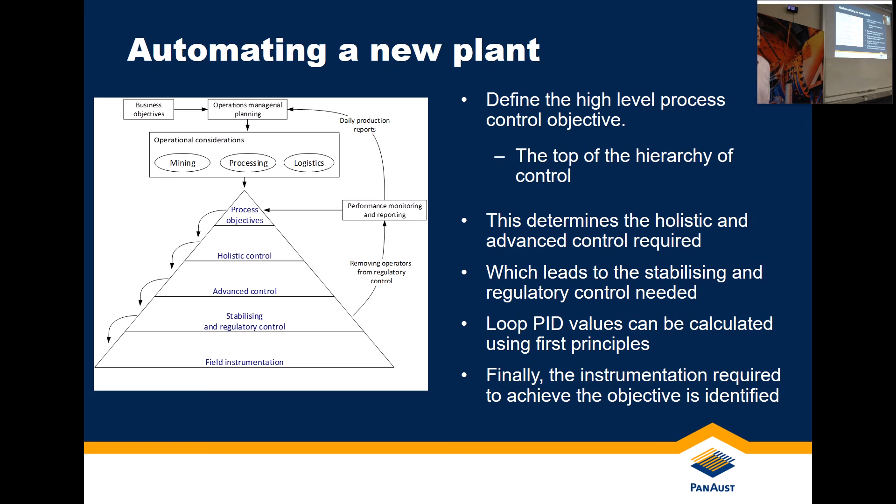Also, the functional specification needs to specify what that plant needs to do. So we can't have the control system guys just writing some code on their own interpretation. No, the functional spec needs to be tight, so that it tells the guys exactly what to write. And going back to hoppers, if we've got so much surge capacity, the guys need to know how to tune those loops for the surge capacity required.

So in conclusion, PanAust used control models developed in-house to automate our plants. This method has provided robust process automation and very high utilization. The reduction in process variation has increased throughputs and recoveries, and obviously we get more money for that. And the control models can be ported to a new operation, which will reduce the ramp-up time.

A new plant must be automated from day one. When we started PanAust, I said, let's start with the feeder automation. And the guy said, no, we're going to run in manual because we don't trust the automation. So we bogged the feed chute to the SAG mill. And then I said, well, if you'd put it in auto it wouldn't have happened. He said, no, it wouldn't. Then the second day they bogged the chute again. So the third day they said, Dirk, please can you put it in auto? I said, yeah, sure. So these silly things that make startup of a plant so tough should be avoided if you automate right from day one.

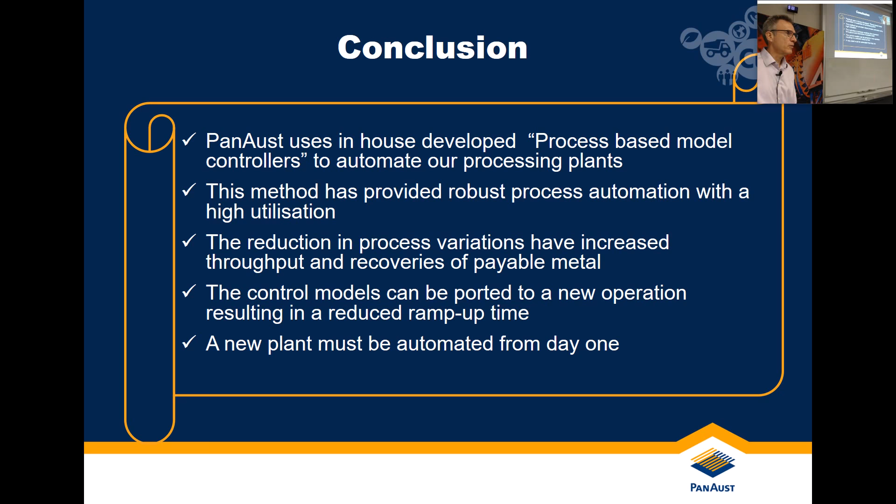When you commission the plant, commission the automation with it, not 6 months afterwards. That's it.